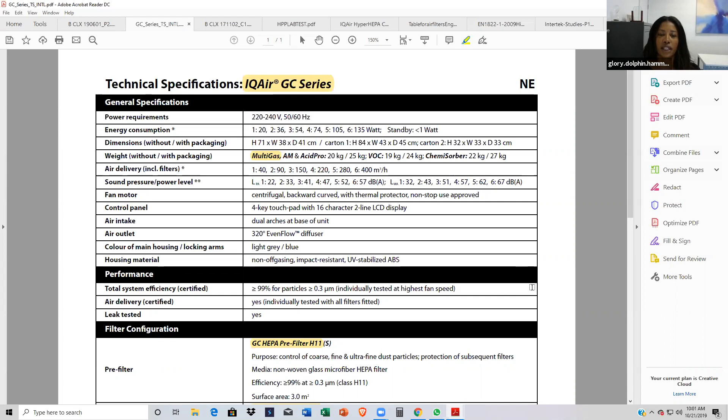Right, Hyper HEPA is one of our marks, but I believe it accurately describes HEPA sort of on steroids, in the sense that HEPA is a term that's basically unregulated. When people hear about HEPA, they're usually talking about 0.3 microns and achieving 99.97% efficiency, but it's pretty much unregulated today, so companies won't get into trouble at all for misusing that term. So we try to really take HEPA to another level, and what we've done is achieve a standard in terms of Hyper HEPA that's not just about 0.3 microns, but about the smallest particles.

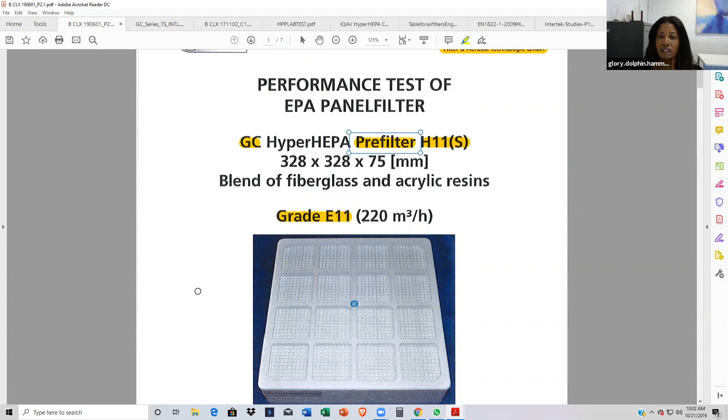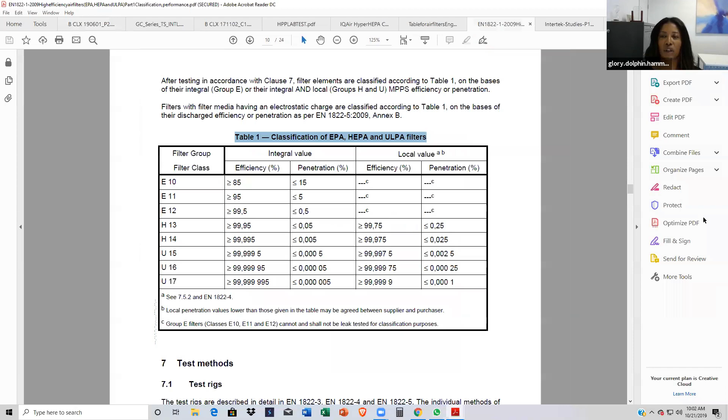What is IQAir's ability with different products to filter the absolute smallest particle, and to filter out basically in terms of what's called worst case scenario—also in terms of MPPS. MPPS stands for most penetrating particle size. So when you have a test like EN 1822, which is the background for our Hyper HEPA, it looks at what is the worst case scenario for this filter in terms of any size particle.

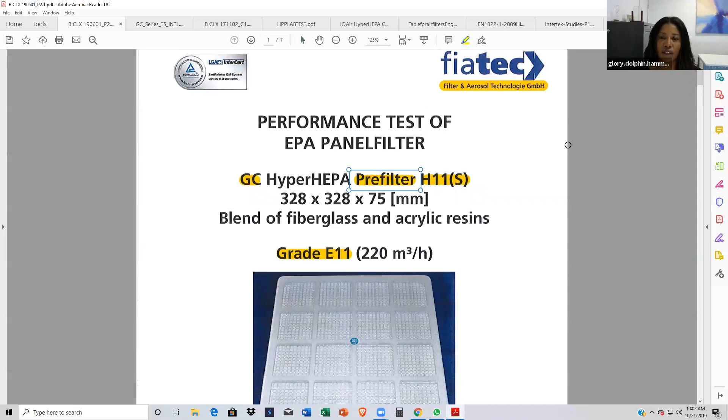Because when it comes to mechanical filtration, there is a bell-shaped curve in terms of the worst case scenario. The point of the bell-shaped curve is, of course, the most penetrating particle size, and it's different for every different type of filter media. So every particular media has its own most penetrating particle size, whether that's 0.01 microns or 0.4 microns.

It's different, and every filter needs to get tested so that it is very clear what that particular micron size is for most penetrating particle size.

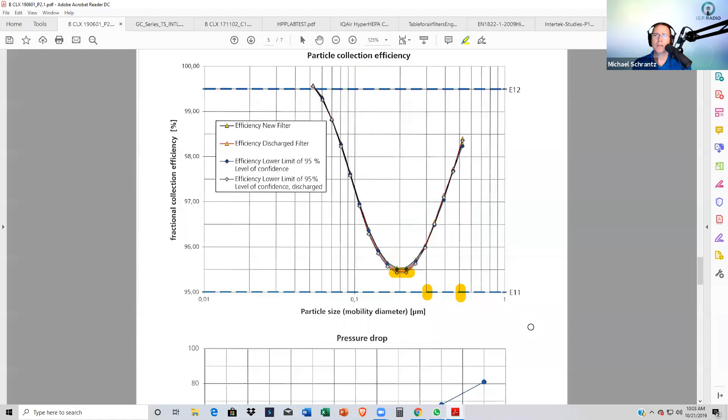Let me catch the audience up, because there's a lot of good pearls that you just threw out. We're going to get into the GC unit itself and how IQAir uses different filters and technologies depending on the product line and what the client is looking for. What you're seeing right now on the screen is that curve that Glory was talking about. I know when we say this in plain English, it's still relative to the topic of particle removal, so bear with us.

But what you're seeing is that there's this general model, and Glory did a great job of explaining that it's not even as regulated as it should be, where people think about HEPA being somewhat defined at 0.3 microns as a particle size and being 99.97% efficient. There's a lot of gray area in those numbers.

Well, what kind of media were they using to establish that? Is that even accurate? Then you get into other issues of how these filters are actually tested - are they testing in the units themselves to give you real measurements versus something in a laboratory chamber that wasn't really reflective of the total product? The filter may do great, but there could be leaks around the filter media. That's an issue, so we'll get to that in a moment.

This curve that Glory's showing is, they're showing that at about 0.19 microns, even this H11, which is a European grading system of filter, is still doing better than 95% efficiency removal of this particulate through a first pass.

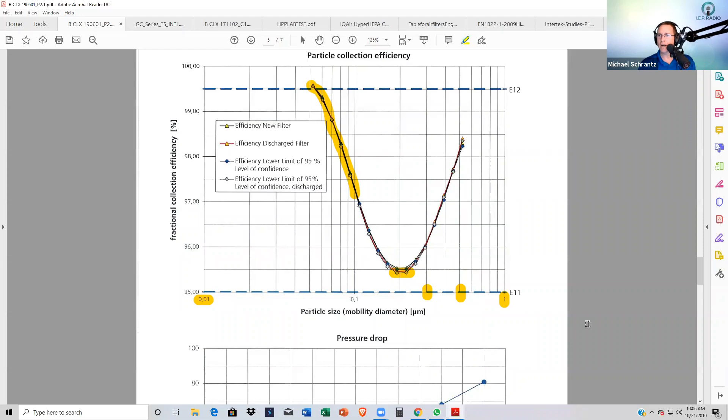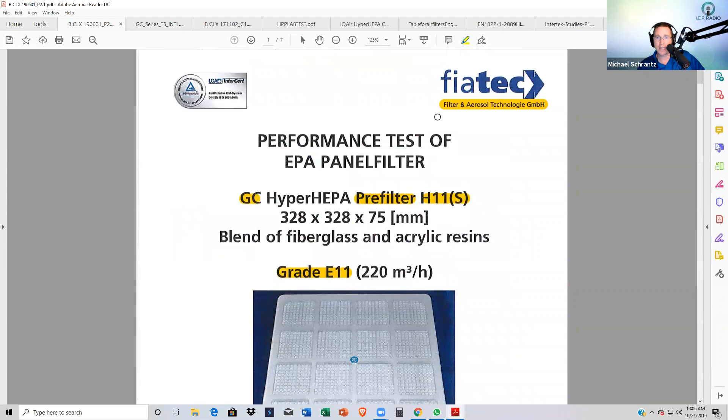So question here to you, Glory, for the audience is, when we're talking about the GC unit, this is the multi-gas unit. These are for people who typically have a chemical sensitivity. They have a focus, but you're still offering, as this independent study shows, really great filtration, certainly better than a standard MERV 8, MERV 11 filter. Absolutely, but you really are focusing on the chemical removal.

What's going on here? Well, yeah, there's different types of chemicals in the air, of course, and every different type of chemical actually needs to have a certain chemical catalyst in order to make that chemical reaction take place.

That chemical reaction is actually called adsorption, and it allows the chemical to get trapped within that gas phase media. In terms of chemistry, you need a catalyst. This catalyst helps create the chemical reaction so that the chemical gets trapped and is removed from the air by the adsorbent gas phase media.

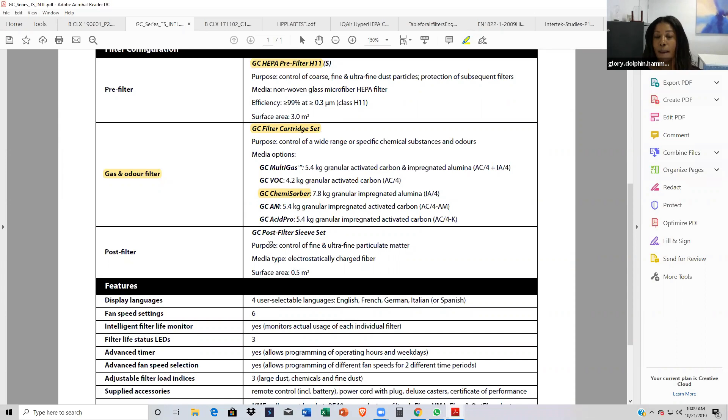Trying to create that contrast between the environment and what you're trying to achieve, it seems like the chemisorber that helps regulate moisture in the air is one way you guys are achieving it. I didn't even think about that until you said it.

That's brilliant. There's really a strong focus with the multi-gas to remove chemicals. I can assure the audience that not all chemicals are free floating. Some of them will be attached to a particle, and those are going to be removed as well. So there's a lot of synergy going on in the unit, layers of protection, last lines of defense for things to go through before making it through.

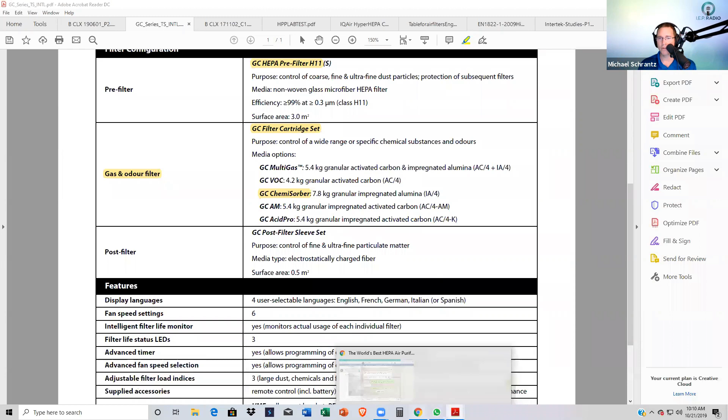I think IQAir is modeling that quite well with the GC unit, a big popular unit. We'll step away from these studies for a moment, but I want to get into the Health Pro Plus series. Like I said, I have one in my son's room. I'll navigate your website, fairly easy to get to. This one is a little different in how you guys set it up. I'll let you do the talking since you work for the company, but maybe walk them through the pre-filter, why it's a little different in its rating system than, say, the one in the GC, the V5 cell. Love to get some information on that, and then finally the HEPA filter in there.

Absolutely. There's actually a 4-stage filtration, because in the Health Pro Plus, the pre-filter is the very first phase that the air goes through. That filter is a European filter, an F8 filter, and it filters out all of the coarse dust that's in the air. It does an amazing job, filtering out about 90% if you're looking at particulate weight of what's actually in the air. So it does a really good job with that.

The reason we have to put in that high level of pre-filter is because otherwise, with something like the V5 cell filters, the pre-filter helps in the sense that particulates will clog up the micropores of the activated carbon or the potassium permanganate. That means your filter is going to last a whole lot less time, because it's been filled up with particulates, and that's pretty expensive media you don't want filled up with particulates. Yeah, I can vouch for that. So that's really the reasoning behind that.

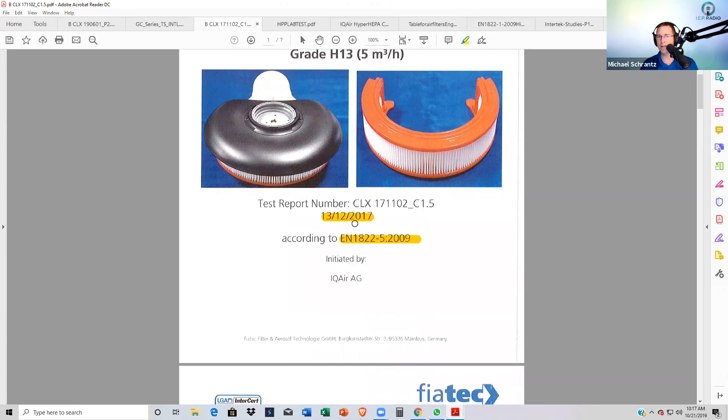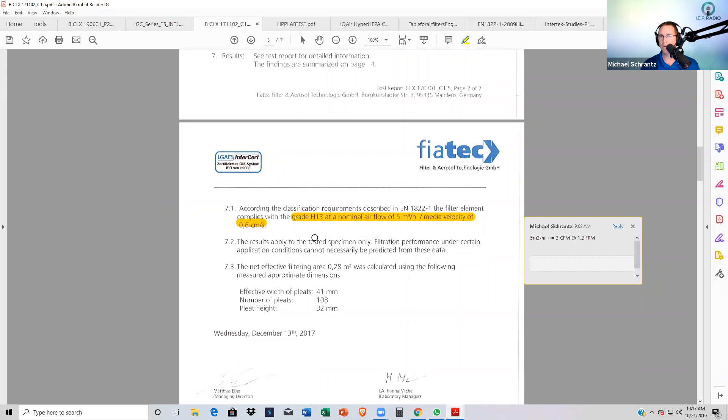And they're testing them. Of course, we see this study was done in December of 2017, following the 2009 European standard for it. And I'm trying to save some of the suspense, but what we are seeing is an H13 rating, which to put that in plain English is very high. It's the lowest particle... I forgot what the MPPS was here.

0.08, I'm judging by this number here. I guess... oh there it is, 0.07. But that being said, look how sharp it goes up. I mean, you're already over 99.97% efficient at that particle range.

And when some people think about 0.3, which I've cleverly marked over here, you're already getting into like an H14 rating, which is far above the layman's claim of 0.3 microns, 99.97% efficient. Just incredible particle removal, relying on not just the filter itself, but taking advantage of the known physics of how particles behave to get you that efficiency on the backside of the curve. This is incredible, pretty impressive when I actually think about it.

But again, if we were to look at the HEPA standard, it doesn't tell all of the story. So 0.3 microns really isn't, for most HEPA filters today, the MPPS. Right, get it? And nobody really, certainly the layman, would know that.

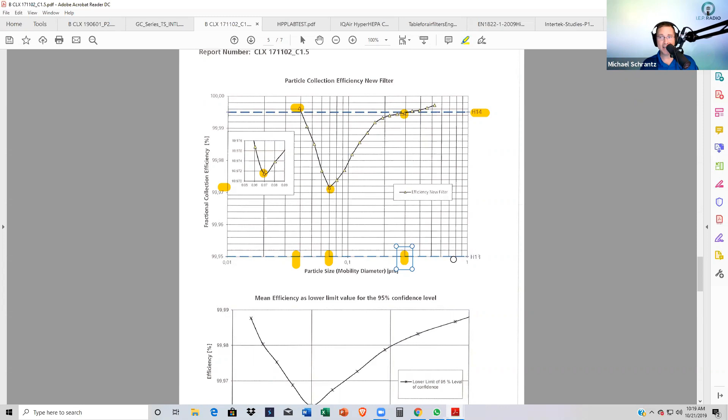I just assumed that the industry was being honest, and that was the most penetrating particle size. You hear it's the one that behaves the worst at 0.3 microns, but it was relative to the media they were using, what the filter was made of. And if you don't know what it's made of, that may not be the worst behaving particle size. It may be something smaller, as indicated here in your guys' studies.

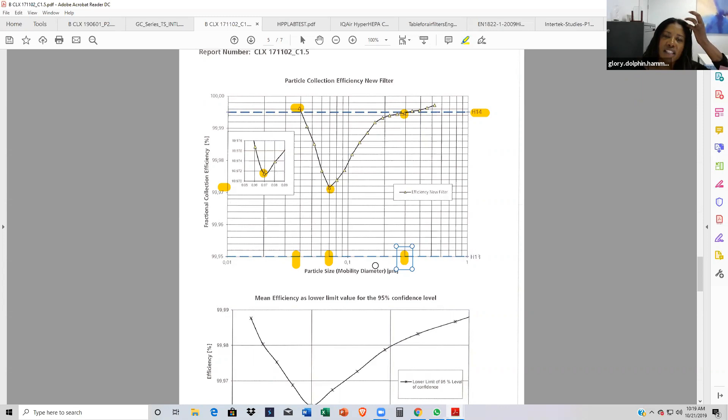Right, actually this information is about, I think, a little bit more than 30 years old. Scientists discovered about 30 years ago that MPPS was not at 0.3 microns, and hence that's why we've got EN 1822. That's why we have other ISO standards that focus on finding MPPS, but we haven't yet caught up in the United States.

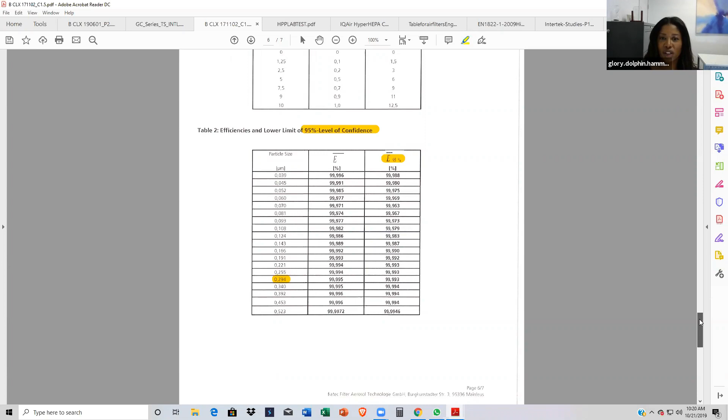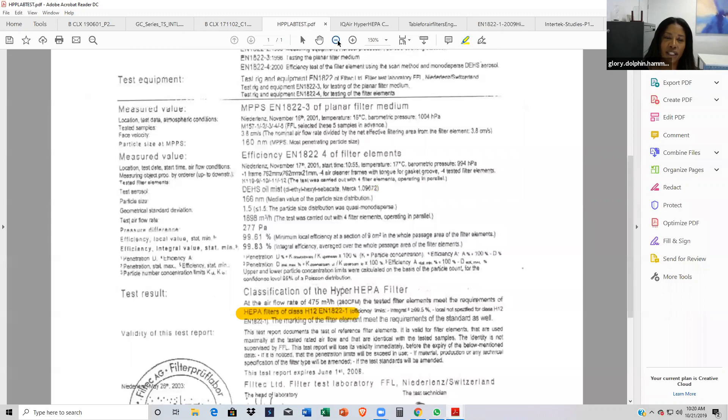So I think that's what I'm hearing. Yes, yes. We move a little bit slower because we work through consensus, and we've got to, as a European company, stay very much so research focused and research oriented.

So we really do focus on the latest research. Your research continues on. We've been jumping around on the different units, covering the multi-gas, which has its chemical removal features. And again, we talked a little bit about the different types of adsorbents, and we'll try and post any independent studies when we get the opportunity to the audience later on the website, so you can get access to that. We've talked about now the Atem.

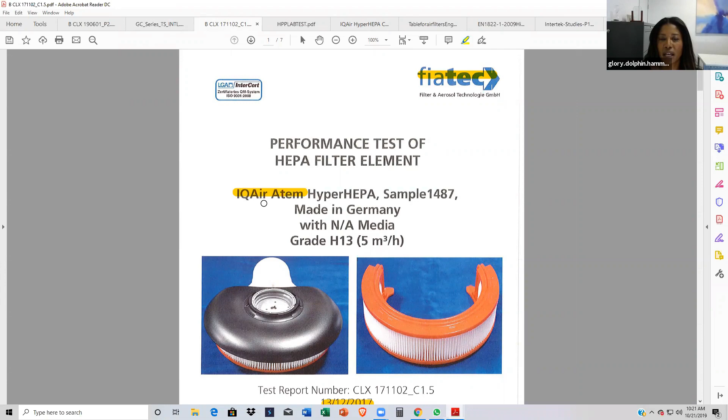There's different models, right, and there's different sizes. You want to talk a moment about that and why someone would choose one or the other? Well, it really depends on what particular types of air pollutants you're concerned about, and so we have different types of systems that focus on different types of air pollutants.

We also have different types of systems that focus on the car, that may focus on the desk if you're at a cubicle and you want to have clean air within just your office for yourself personally. We've got the Atem series for that. Right now, I think we're looking at the Atem Car Air Purifier, which allows people to have the cleanest air really within their automobile, which is great.

And that combines with a 5-in-1. So if you want it in your car, if you want it on your desk, if you want to even take that with you and travel with your air purifier and have it on your hotel nightstand, that's also available in the Atem 5-in-1 series.

So am I understanding correctly that it is similar or the same technology between these two, the desk and the car? It's just a capacity - one's going to move more air, filter more. Is that correct? That's correct. There's different types of filters in the car, Atem Car - it does actually have, in addition to particulate filtration, gas phase filtration.

Oh, interesting. So you actually add that part in the car model. Yes, because we feel that if you're inside the car, in a major metropolitan area, that's something you definitely can benefit from. And again, it's all about an adsorbent - you're not using some purification technology to manipulate or create PCOs or ozone. That's not what you guys are promoting. It's really physical removal from the environment.

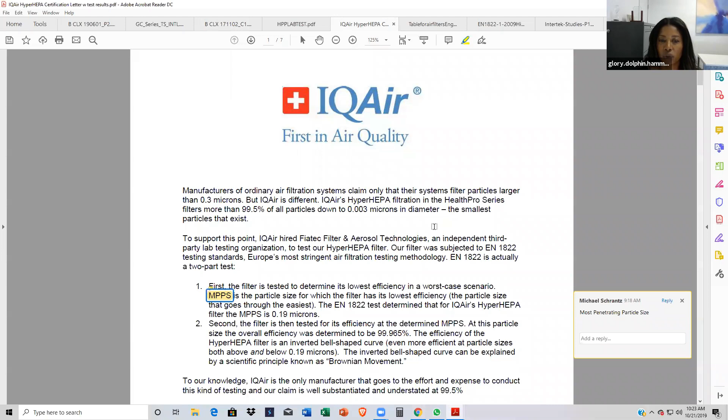Absolutely. We really truly believe in using safe technology. We know that a lot of consumers who look at air purifiers are actually looking because they're sick - they may have allergies, asthma, or something even worse. What we want to do is always make sure we're not adding anything to the air that could possibly harm our customers. We always want to be conservative and on the safe side, removing air pollutants and never adding air pollutants to the air.

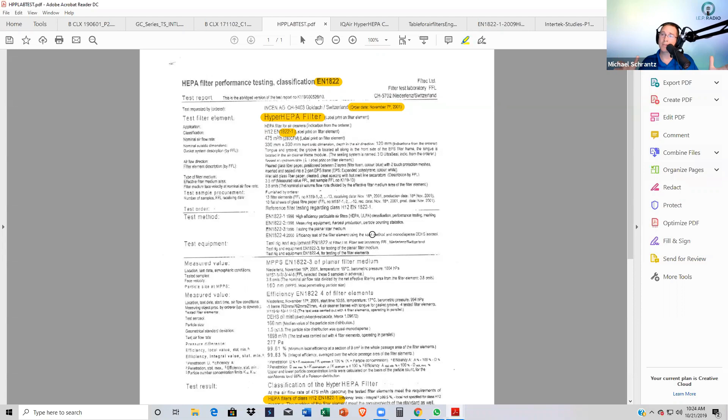For the audience, there's more research they did send us. We won't spend too much time on it because I think Glory did a great job explaining earlier about the Health Pro Plus and what's available. But the takeaway here is we do have independent studies showing efficiency of these filters, this Hyper Hepa - the one I have in my son's room right now - really going above and beyond, and again being tested in real life scenarios, meaning in the unit themselves, not just filter component testing, as you mentioned earlier. I'm really impressed and really comfortable supporting this technology to our audience, because I think that's what matters.

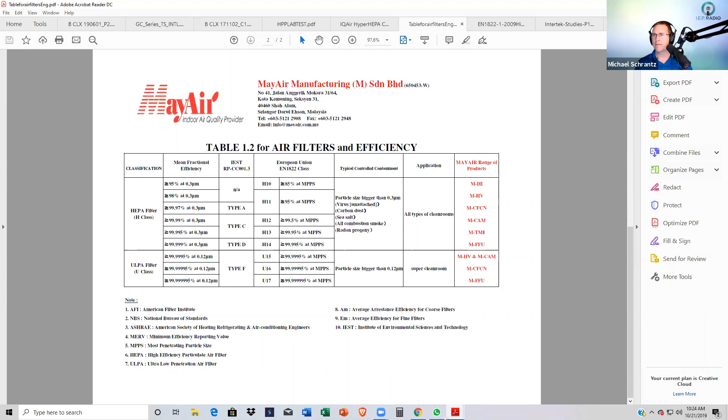Everyone's always a little bit scared, in my past experience, of sharing their data. I don't even mean for proprietary reasons - that's different. I mean, because no one here is trying to solve world peace. We understand that if you have a chronic illness, buying one of these units may not make you better. It's not going to pay your taxes. But we understand in the indoor air quality community that removing contaminants from the environment is traditionally considered a good thing.

Now, we're not trying to create a literal clean room for you, but we would like to lower that stress your body is experiencing, especially in some of the more contaminated countries. We got a lot of things maybe not right in the U.S., but we got a lot of things good in terms of pollution compared to other countries out there. So, these are great units to consider purchasing, which will segue...

Actually, I want to talk about one more product line, if you could bear with me, and that's the Perfect 16. These devices we've been talking about thus far have really been modeled on portable pieces that you can take with you. There are homeowners I've worked with before that have a Perfect 16. Maybe talk a little bit about the Perfect 16 and why you guys have it designed in the box that you do, and what the claim to fame is in terms of particle removal.

Well, we're really trying to achieve the highest level of filtration that you can have within your system, within an HVAC system. An HVAC system is really limited in terms of pressure drop. So we want to see how we can create a nearly HEPA system without the pressure drop. That's really the thinking behind the Perfect 16 - we actually needed to create additional surface area, so that we could really truly achieve high level filtration with an extremely low pressure drop.

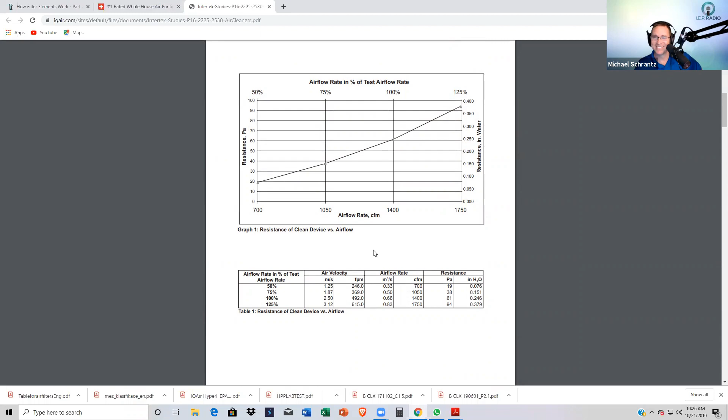Our pressure drop is so low that our Perfect 16 lasts up to 3 years without being changed. I didn't know that, it's pretty amazing. So if you have 50% duty cycle, our Perfect 16 filters will last about 3 years. And that's great because a lot of consumers don't like to change their filters.

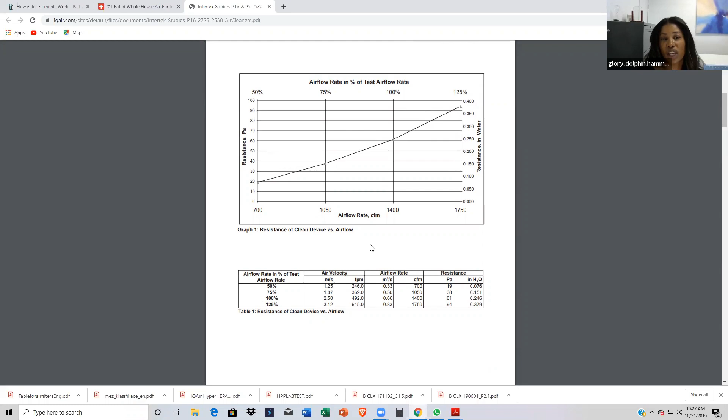What a colorful way of saying that. I think that's reality though, isn't it? Yeah, we're not as good as we should be, and I would include myself in that. I think technically, when you read the manufacturer's labels, the standard 1-inch filter needs to be changed once a month.

But let's be honest, how many of us actually change that filter once a month? Yeah, don't raise your hand, she'll see you. It's true, it happens to all of us. Perfect 16, so it's every 3 years for me. Right, okay, well, there you go.

But having that forgiveness factor with the amount of surface area that you guys create in this box, it's not going to be for everybody. There's going to be places where their furnace or air handler is located in a closet with the minimal amount of space, certainly not big enough. But for those of you who have this option, this is why it's here for you.

And the argument could be made that it's all about economies of scale. You're trying to filter out the most, and you have a distribution system, aka your forced air conditioning system with ductwork that can distribute this filtered air through the house, certainly more efficient than a portable Health Pro Plus. Now, that's not to say that the Health Pro Plus doesn't have the benefit of removing smaller particles. In my case, I have my own version. I don't have the room for a Perfect 16, but I would absolutely do it if I had the room. What I have is what would be equivalent to maybe in the European numbers, an E9 or a MERV 12 filter, but then I complement that with a portable filtration unit, knowing that they can work in harmony together to ultimately lower those particle counts.